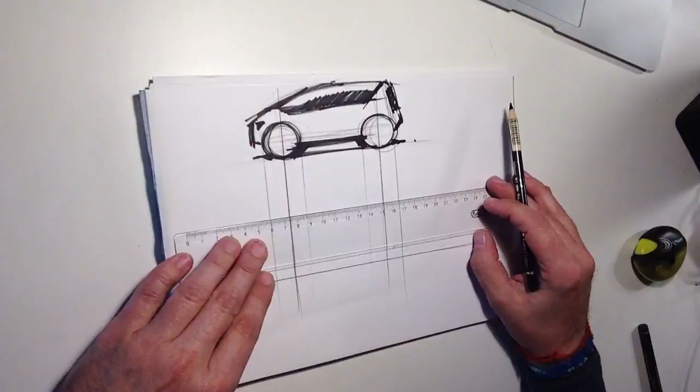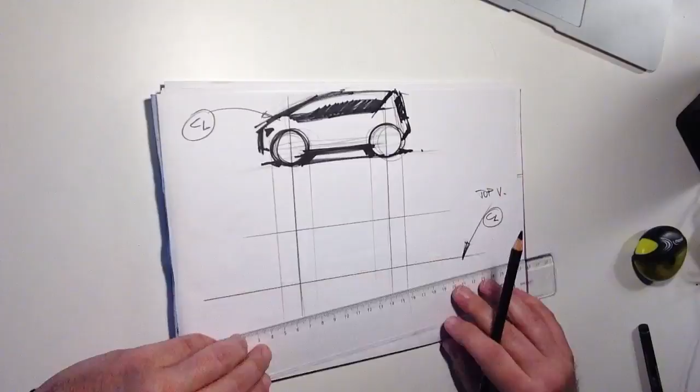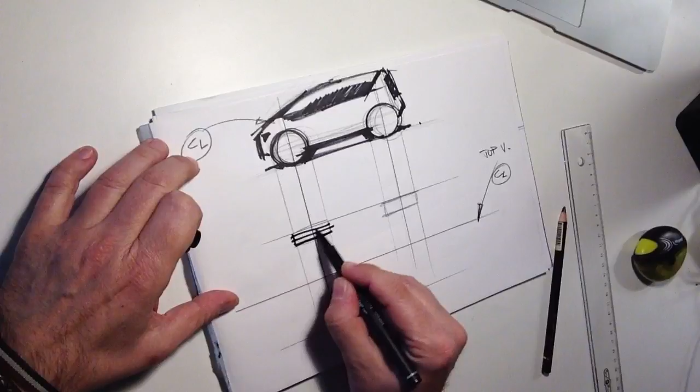So if this is a center line, this one, okay? It's our center line, all right? This one. Those are our wheels. Then we can say that this one is a center line from top view. All right? So, let me see. Let's imagine that the car is as wide as this, okay? So, what happens? Here we know that we have the wheels, right? Okay, so let me use my black marker so that it's very simple to see. All right, those are my wheels. Great. Now, let's put the rest of the car in top view so that we can see our beautiful design in top view. Okay?

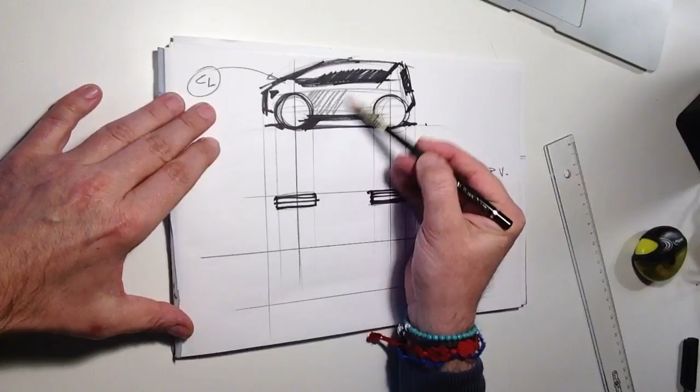So, do you see something wrong? Tell me. What do you understand? Once I do that, what did you understand right away? Look. Inside there is a nice sketch. You know, I can imagine that I do some nice shading here, okay? Okay, if I do my shading like that, okay?

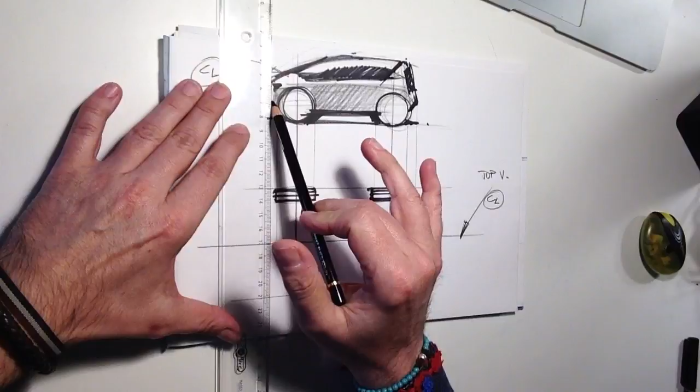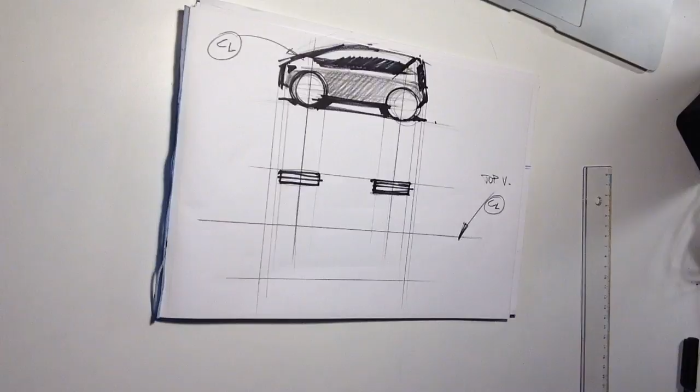This means, here, for example, let me take the line of my reflection, where the reflection is starting. Let's place that line here, okay? And this one, it's gonna be here. So let's place that here. Do you understand what's going on? I'll tell you what's going on. And then you will say, oh my God, I can't believe it's like that.

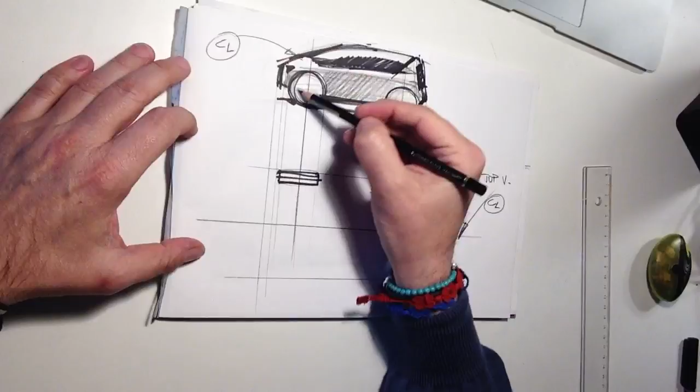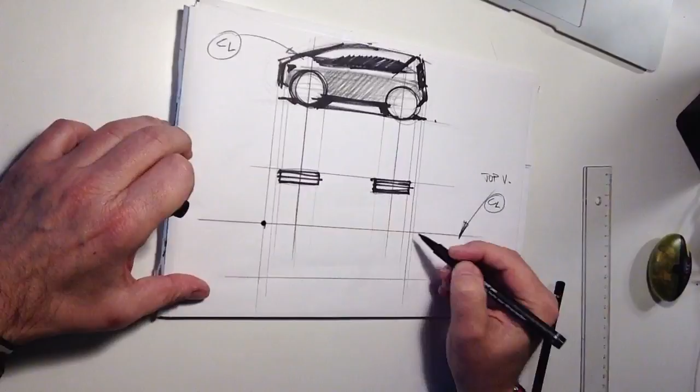Look, if this is the body, the side fender, the side of the car and the side rear fender, in section, watching from the top, we know that this point, this one, is the most out point of our top view section, the outer point. So it's this one. Let me put it really dark. And here also, in the back, you see?

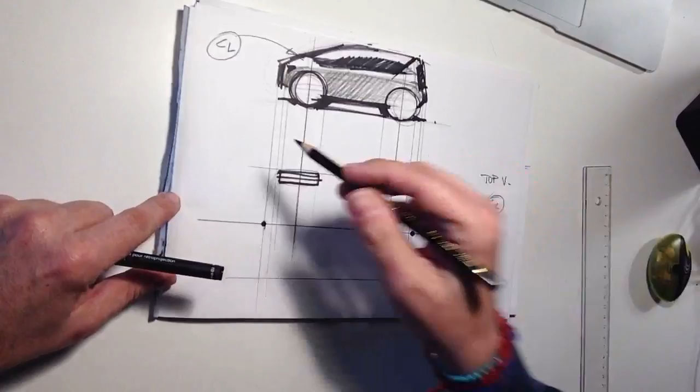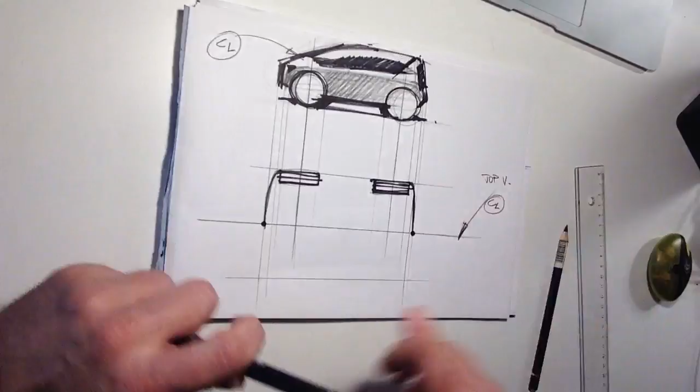And we know that until this point of the reflection, this section is not turning yet, because we have a reflection there. So this means that our side top view section is like this. And in the back is the same thing. Okay, let me make it black now, so we can really see the section.

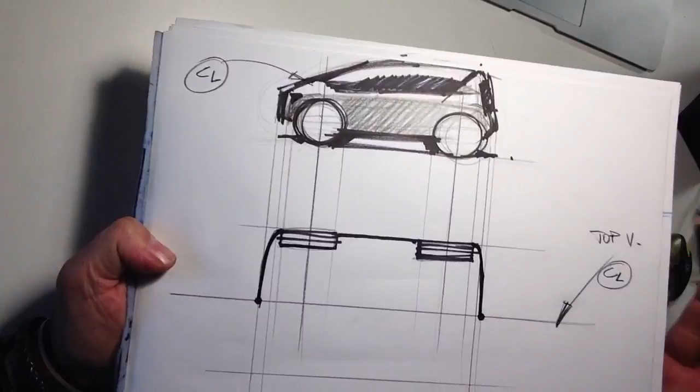Okay, so let's see closer, all right? I hope that you can see better because I'll try to explain to you a little bit. This is a little bit of geometry, I know, but this is very important. This is very cool for modeling, but this is also a way to understand what we do. The sketch is nice, you know, how many times we do sketches like that?

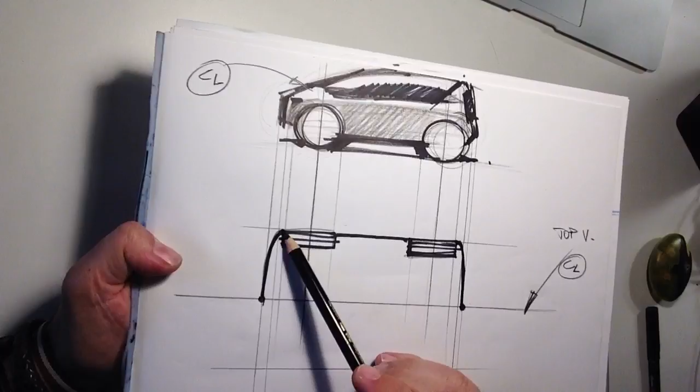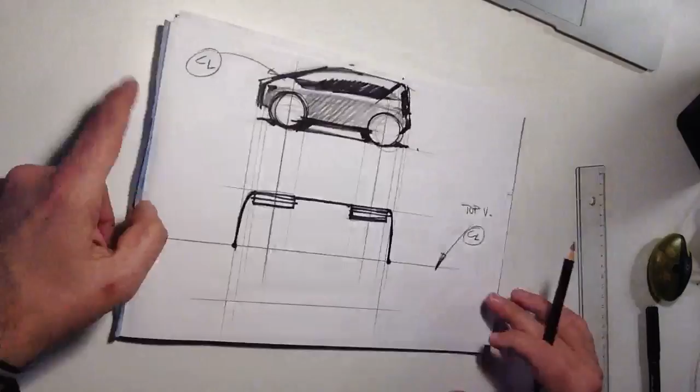But when we see that section here, we see that here we don't have much space for our reflection, which is this one. This is a part of a cylinder, okay? Big cylinder there. And here also. So this means that our top section is really flat. This is the thing that you have to understand. This is a flat section. And in the back also.

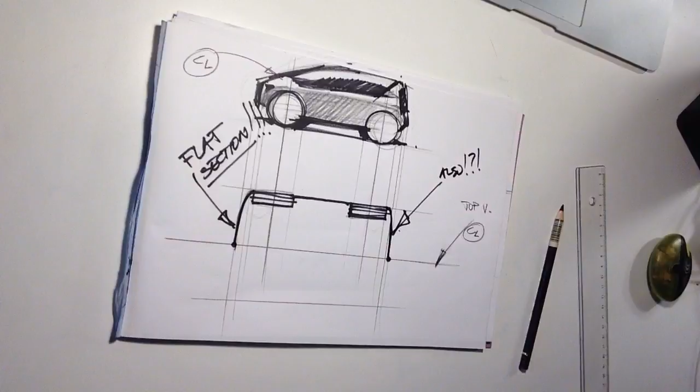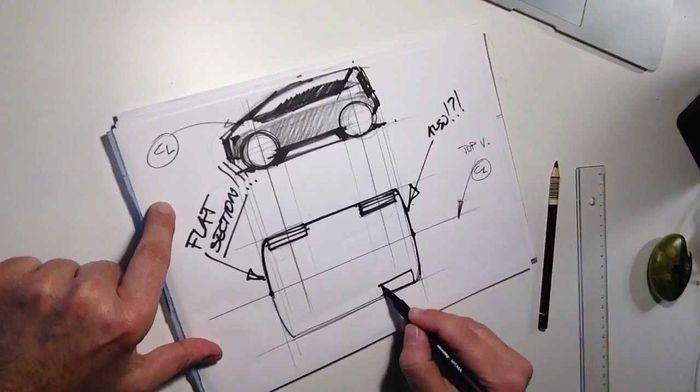So this means that if I do the symmetry and I complete the same section on the other side, and I know that my wheels are there, more or less, can you see we're doing just a box? This is a box. Is this sexy? Is this nice? Is this modern? Is this a real design? What do you think? In my opinion, no.

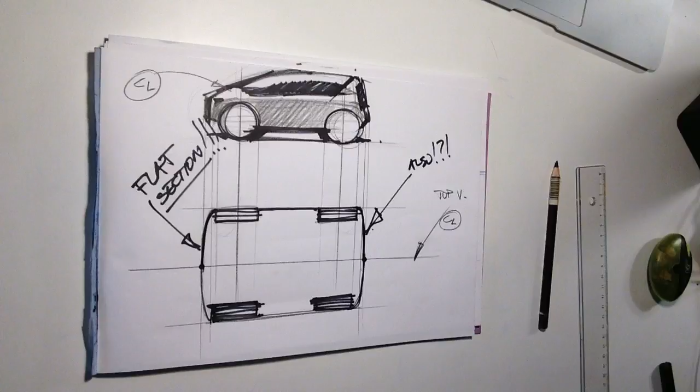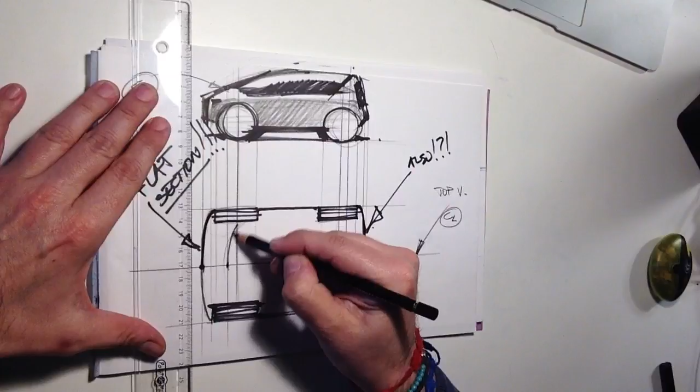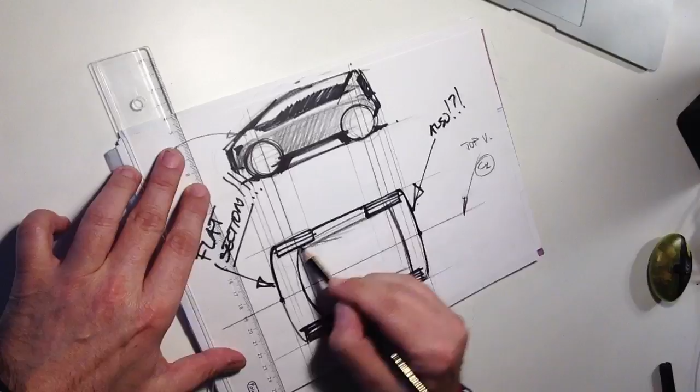Because if I have to do this, let's imagine we are taking all the points here and we continue our exercise. You see, now that I try to complete, to finish, and I put the greenhouse. Come on, guys, this is not a car.

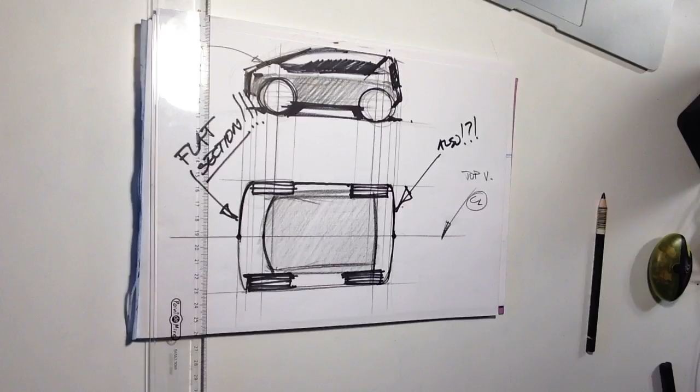Christian, I didn't understand your question, I'm sorry. What we need to join any car company at designs job or exterior? Christian, line weights, we already did an excellent sketch session, which is video number 1. Go and check it out and you will learn what line weight is, because I explained it there for 20 minutes sketching. So you can go there and see. All right?

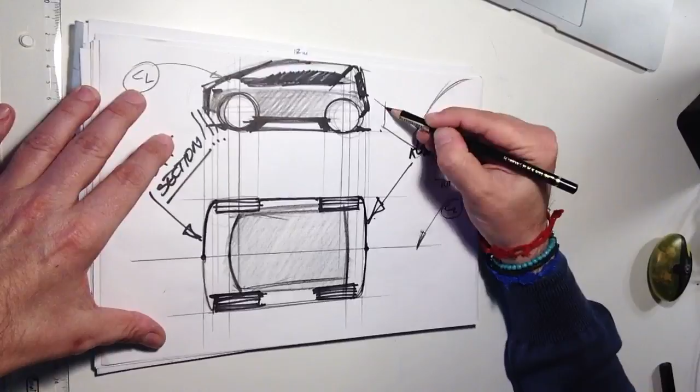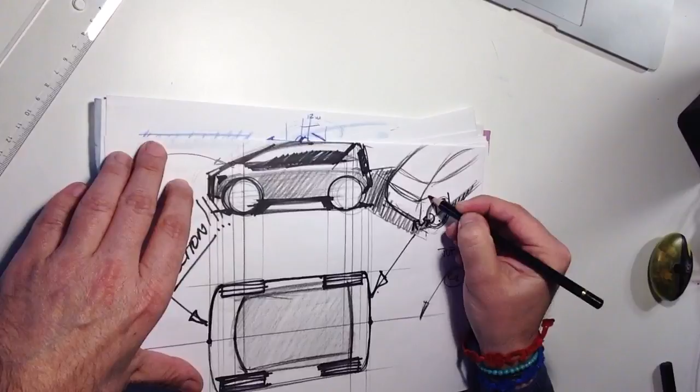So this is just to show you that many times we see a lot of those sketches and people do not realize that they are really making an almost flat car. You see, with just a little bit of crown. Honestly, this is not nice. You see? It is not nice, it's too flat, it's something old. This is an old design. Alright, so,

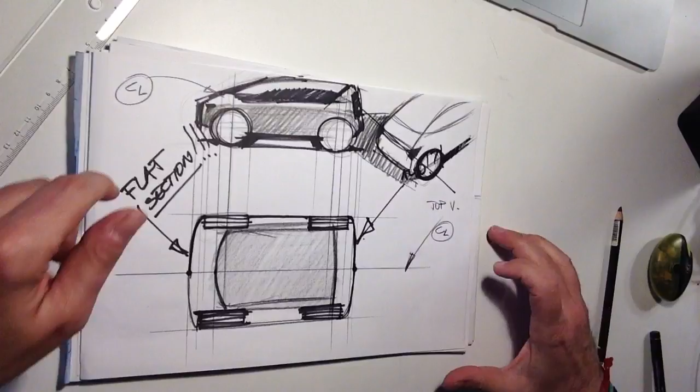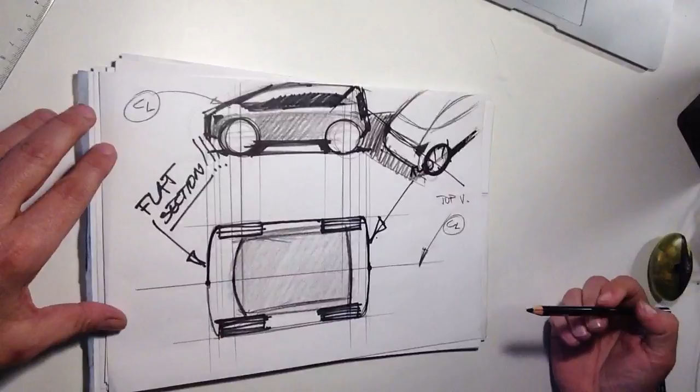Hey people, ciao! Today, people, I am explaining something about the important value of the sections that we make that will determine our real design. So I made a very quick sketch whose side view looks really nice, you see? And then I translated that section and that side view into the real top view of that sketch, which is this one. I translate all the lines with our center line in top view,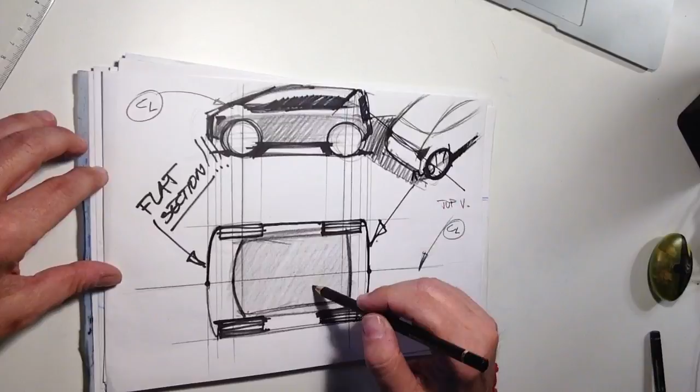more or less with good proportions. I put my wheels, and then I'm trying to explain that sometimes sketches that we make look nice in side view, but they are not really nice when we translate them into the top views with the right dimensions, because we make flat cars like this sketch here, this 3/4 front view, you see? Everything is very flat. And I'm saying that this one is not nice. Why? Because in the end, it looks very old. And we don't want to do old stuff. All right?

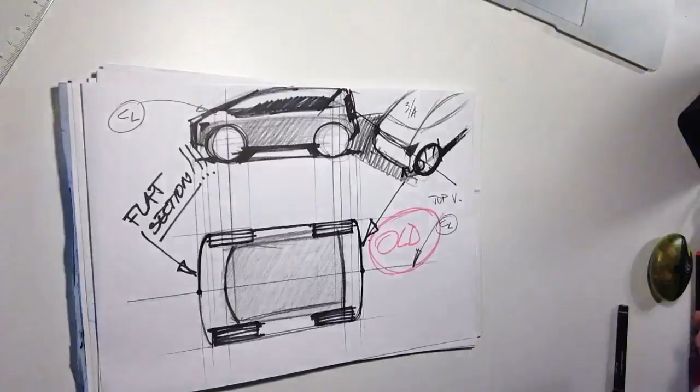Yeah, exactly, Peggy. So this means that when we make... wait, I'm just preparing my next page so that I don't have a bad sketch. I want to assure myself that we have a really nice, soft one. Voila, there you go. So when we make a side view, okay, and we start placing our wheel, front wheel, and then we place another wheel in the back, all right?

And let's suppose we want to make a nice silhouette, okay, side view, to make sure that we make something that looks nice. You know, we can decide that the back can be flat, a little bit flat, but the front will be more round. So this space, it's very important, this one. This is called front overhang, rear overhang. Yeah, Sebastian, you're right. Because when we do this,

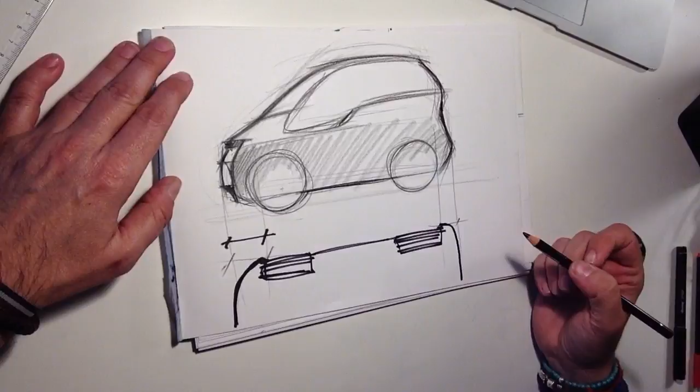So did you get the idea? Yeah. Yes, baby, you're right. It's a kind of the right compromise. Now, this section here, we can make it underneath. So negative, all right? Could be interesting. Nice.

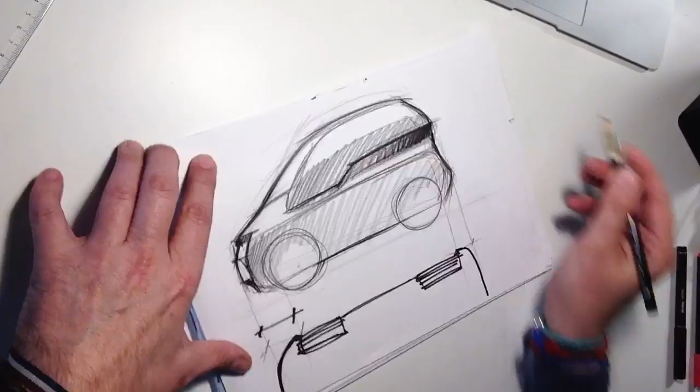Imagine this is a two-seater, just two people. And also your windshield, of course, has more space to turn around instead of having a windshield which is flat. So that's important. Those are important things we must think about when we start sketching. And this gives also, of course, the proportions of your car.

Now this section is really ugly. I'm gonna clean up because I really don't like it. You see, but I can always go back and clean up my sections. You see, I'm trying to make this much nicer because there was a proportion problem. You see, now I'm cleaning up. You see, much better here.

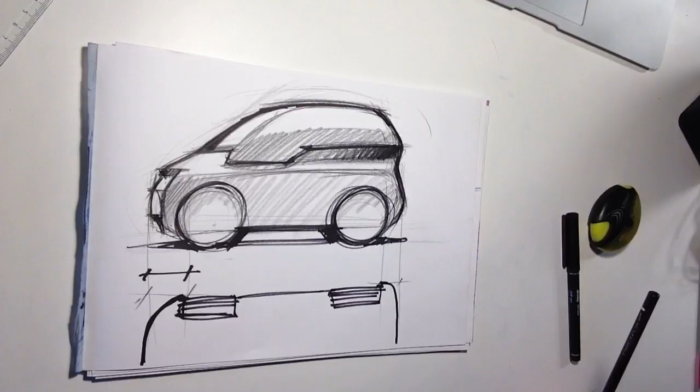Sebastian Gonzalez, the car that I was referring to is called, yes, the Kiwami concept. Yeah. Strange. Yeah. No problem. You know, sometimes strange is not so bad.

Now, if I start thinking about my shading, okay, you can understand the volume. You see that there is a volume that is breathing, it has the space, you know, it has the space to turn. And it's very nice. Okay, in the back it's a little bit more flat. We know that. We want that.

It's okay. You know, also for aerodynamics, you want the front to be much smoother and the back a little bit more architectural, because the air, when it arrives here, has to be cut so that the air doesn't make resistance in terms of aerodynamics. So it's easier to have a back, you know, like with a wing, like this one, for example.

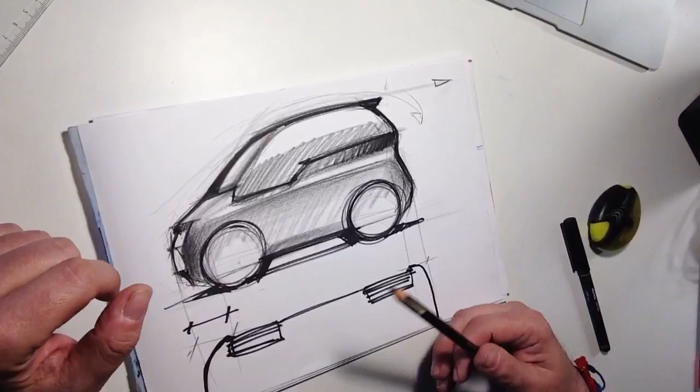How is the design process organized in production? For the production design process, Soslan, I made a video that you can find here, which is called How a Sketch Becomes a Car. When you go and check that video, you can see that I explain the whole design process in a very simple way, funny way also, and I am sure you will have all your answers. And just in case you don't, then you come back to me and ask questions.

Yes, Pepe, il distacco dello strato limite is this one, yeah, il distacco. And you know, sometimes on the side here, we make some sections that sign a line here, right? And this is done on purpose at the end of the rear part, because what's happening on top, it's happening also on the side. So here, imagine I make a section here, then we would have the side, and then you have a break. This break is this line here.

All right? It's done in a way that the air will come here and then will continue on the side. Why? Because here there is a break. It's like a cut. All right? If this was very round, the air would go in the back and then it would do that, and that's not good.

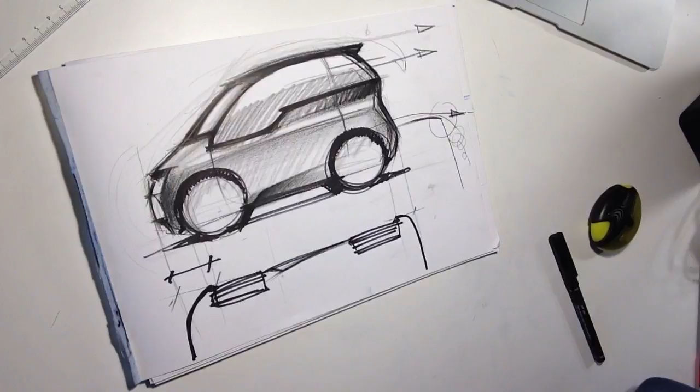Alright, so can you sketch the back view of any car, please, sir? Yeah, of course. The back view, of course you can sketch it. You know what I do now? Look what I do. You can try to do this at home also. Look, I put this underneath here. And let's imagine that I want to do some back sketches. So, I know that my section is like that, because we sketched it before.

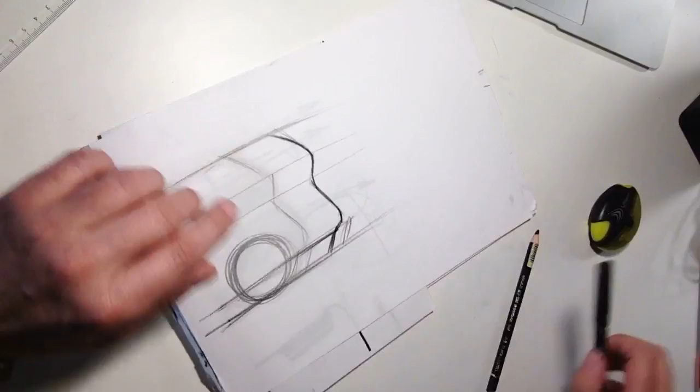Look what I'm trying to do. I'm using a part of my side view to turn it into a 3/4 back view. And then I can imagine how I could do the back view sketch design. Look, this was a circle, now it is an ellipse, okay? So it is not a circle anymore. Why? Because it's turning, of course. So the circle starts to get compressed. You understand that?

So I apply a few corrections, okay? And then I'll start making a sketch, of course. So my side view is this one. I'll put it here so I can see it. That's my guide. And now that I have this, let's imagine what I can do with that. So I had this line here coming high, okay? Then I have this line, which is the glass area, which was like this before it comes down.

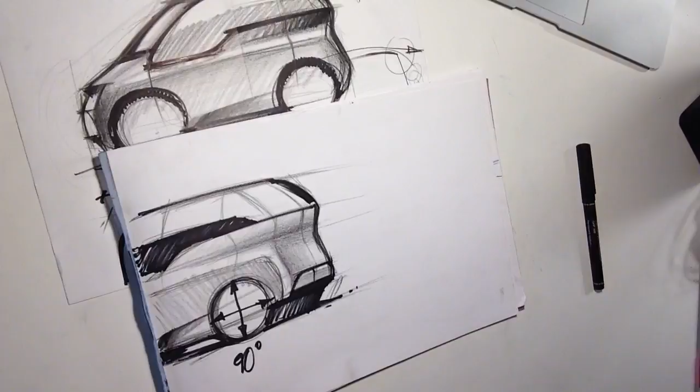Okay, a little bit of shading just to show well how the surface is. Can you see it? Wait. Whoops, upside down. Can you see it a little bit? Well, now we're going to put some lights and try to give a sort of design. I don't know if it looks nice or not, but here we have to make the surface of the wheel well. If we don't do it, it's going to look very strange. Okay. Now it's a little better. In terms of proportion, it is better.

Okay, we do our wing. Okay, so what are we gonna do? Instead of a horizontal light, maybe we're gonna make it vertical.

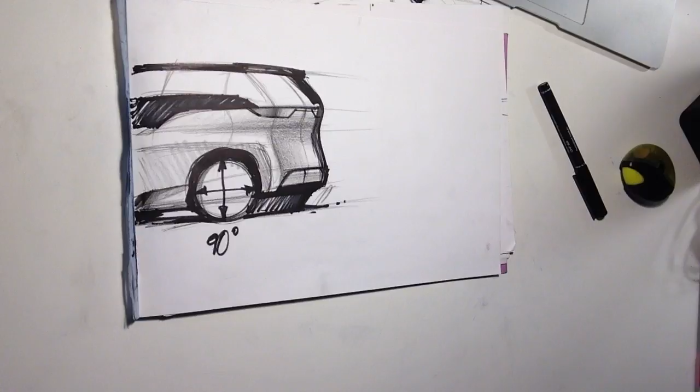Okay, so this is the first thing. Now we have the cut line, all right, because I imagine we have something that's opening in the back. Of course, we hope so.

And here we make a sort of a door handle area where we can put our hands. Okay, so this is a bumper, okay, this one. This is our back opening, and we can make our cut lines here, you see? And here it's like this in the front. There you go. You see?

Now, once I do that, of course, what can I do? What else can I do? Okay, I complete my shading in a way that I show that the surface around it is almost spheric. Okay, so I have to apply the shading of a spheric surface. You see? And now, of course, I can do many things, because I can take this one,

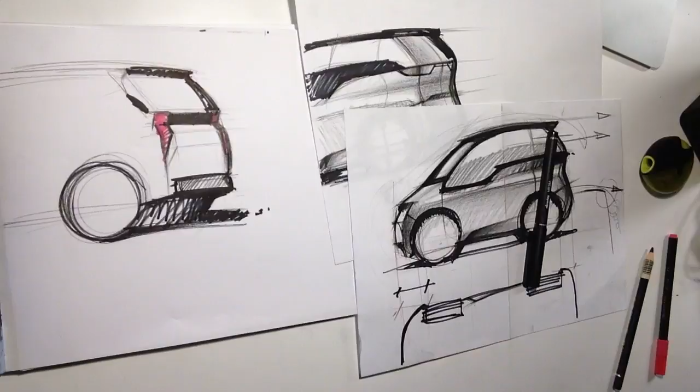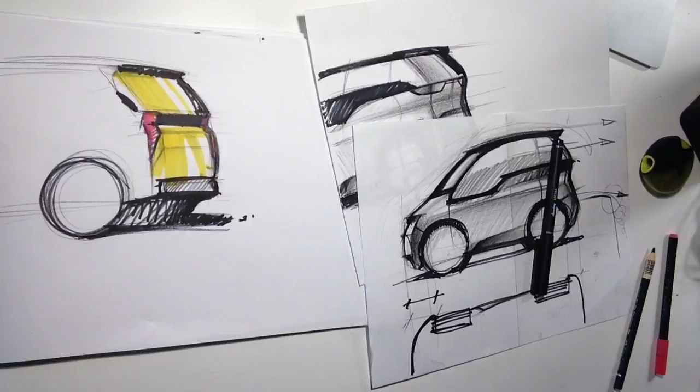So, is this interesting? That's the question. Yes, no, we'll see. Quick sketching. But we've got to feel it. So that's important. Alright. This is nice. I kind of like it. You know, now that I see it, I have a feeling of putting, I don't know. Let's see. A little bit of color, get something. Okay. All right.

So today, a 3/4 front view of a sedan. Well, you know what? We did this, but we did it in another video. So just go back and check some old videos.

Or Copics. No, this one is a Chartpak marker. But you can find Copic markers, which are better. This type of marker is mainly used in the United States. In Europe, we are using a lot of Copic markers lately, which are better.

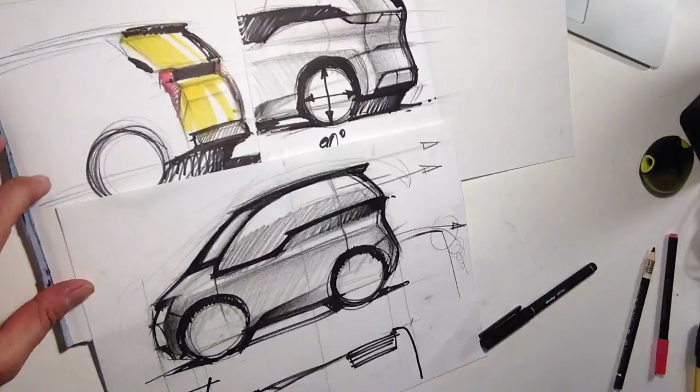All right, so let's make it a little bit darker. Just to make a little bit of reflection, a little bit of shading done with the marker. Okay, so now you know what we're gonna do?

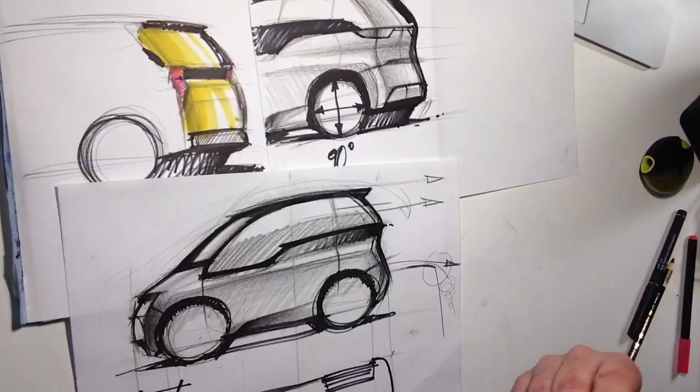Pepe, this one, if you smell this, I think you're gonna go laughing in the streets for quite a long time. So we've got to be very careful using this.

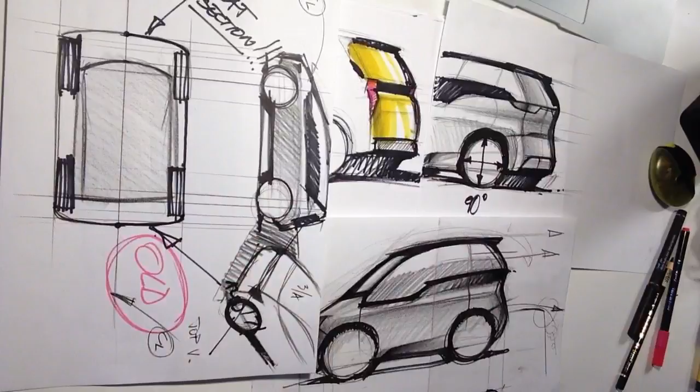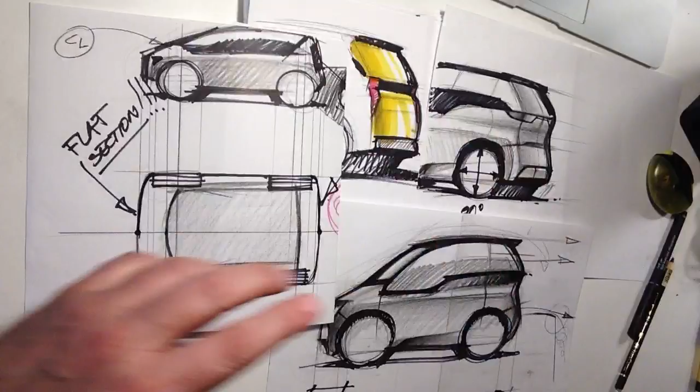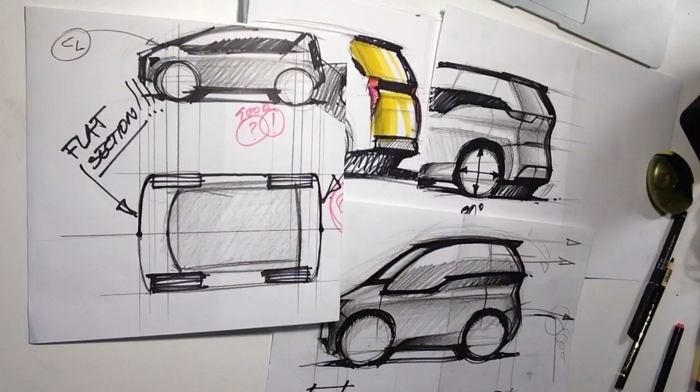So today, look, we did some interesting stuff, okay? I put it like that. I don't know if you can see all of it, but this is quite a nice lesson, if I can call it a lesson, because we understand what happens when we make a quick sketch. All right, let's do this. When we make a quick sketch, this one, it looks good, but the question is, is it really good? And then when we translate that sketch into a top view, we understand we are doing something a little bit too flat, okay? Something that is just too flat. And